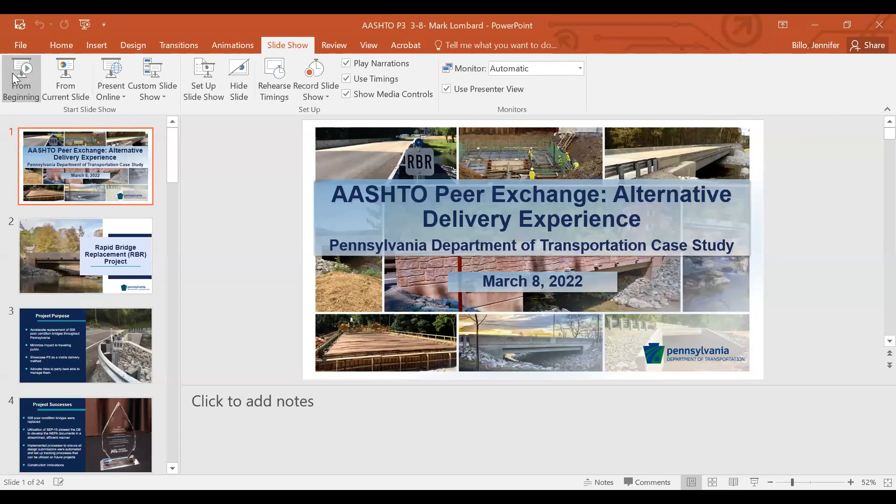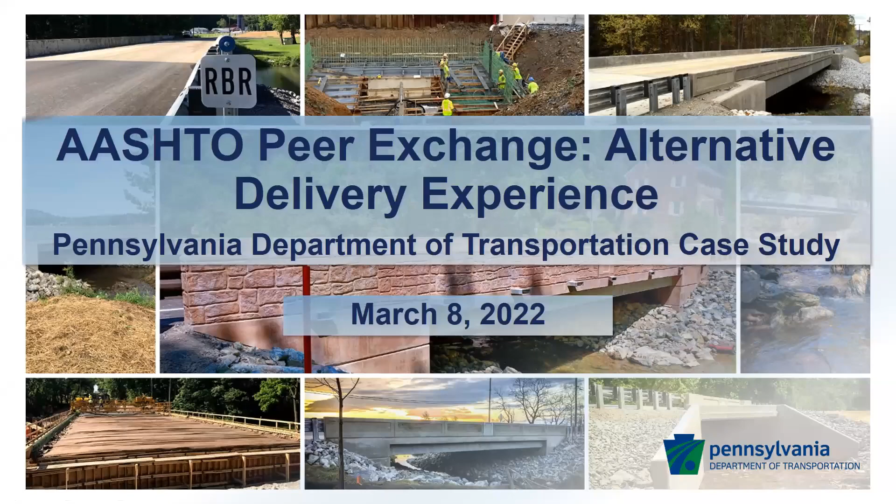I'm going to first talk about our rapid bridge replacement project, which was a P3 procurement project. And then we're going to talk about some of the comparisons of the alternative delivery, basically P3 and design-build. The RBR project was, like I said, a P3 project that replaced 558 poor condition bridges throughout the state of Pennsylvania. It was a project in which the development entity designed, built, maintained, and financed this project, and they have a term of 25 years to maintain the bridges.

One of the primary benefits of this P3 alternative delivery model was that the Commonwealth was able to replace these 558 poor condition bridges, and we did it as a complement to our normal program. So we were able to continue on with our normal program, plus address a great need within the Commonwealth of a lot of poor condition bridges. Next slide, please.

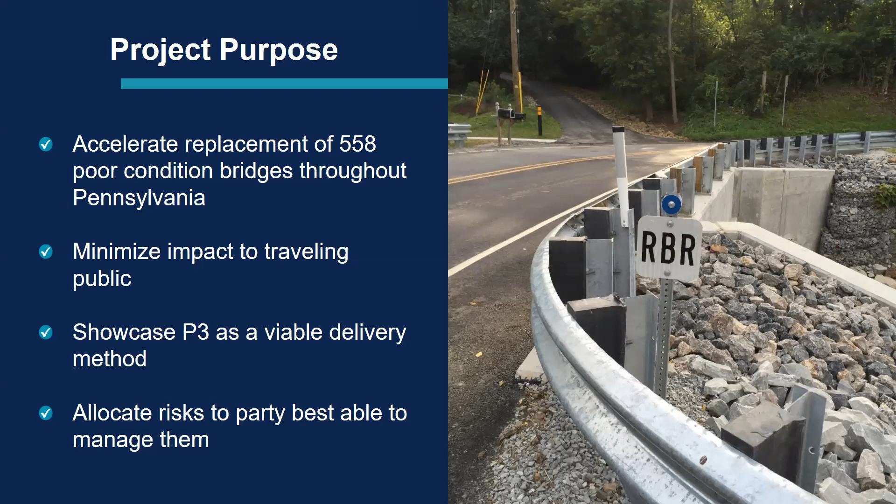Okay, we did have to get a SEP-15 approval for this project, because we did have the development entity do the NEPA documents on that, and Mark will probably touch on that a little bit more. But this was kind of innovative, and without this, we really couldn't deliver this project on time as we had promised. Next slide, please.

Okay. After the project was done, we worked with the development entity hand in hand, and we developed lessons learned throughout the project, so we can learn how to do things. And the first thing we came up with, as someone alluded to before, is whenever you use an alternative delivery, you have to use it on the right project, right assets and things of that nature. It's not a one size fits all. So project selection is very key.

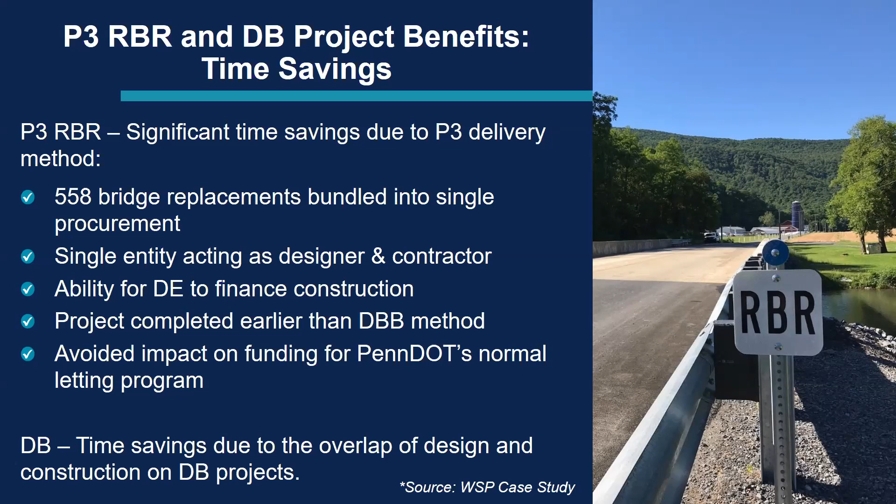The RBR project, PennDOT was in regards to change orders. We did have a lot of what we're calling here owner-directed change orders, which we knew going into the game we would have to process. For example, a couple of things we took on were utilities relocation. We paid for the utilities relocation and any unforeseen environmental hazards that were out there. We knew going into the game we'd have to write those types of change orders.

But as you can see by the last bullet there, it's coming back to the right of way and utilities. Sometimes no matter how good you do your job in regard to that, if you have bad right of way acquisitions and some of your utilities go bad, that can turn sour real quick.

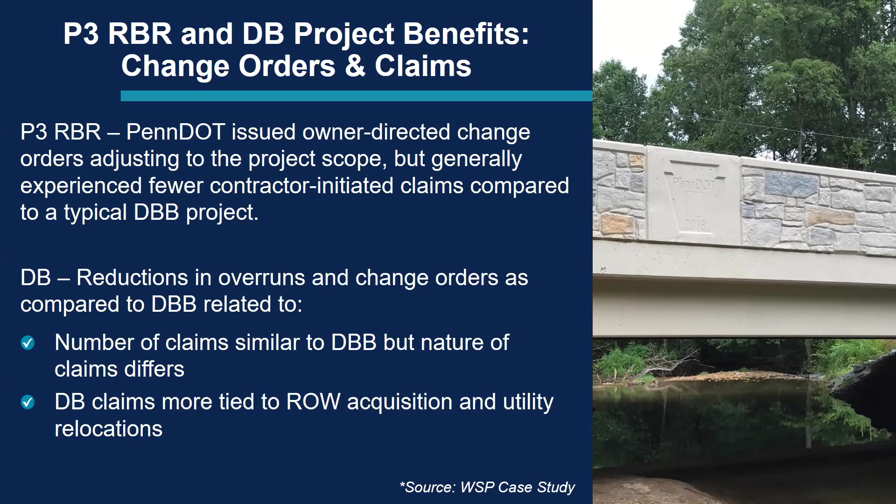All right, so the last slide we have here is regarding the comparisons of the P3 compared to design build and design bid build. With the P3, it depends upon your type of project and what type of innovation you're going to get if it allows for that. But we have found that the P3 project, along with the design build project, will give you a lot more innovations. It gives them a little more flexibility as opposed to design bid build.

And we found that with the two alternative deliveries of P3 and design build, you're going to have a lot less scope creep than you would during design bid build. So that's a quick comparison in regards to our experiences using alternative deliveries. I'd like to next turn it over to Mark to talk about the NEPA experiences we've had and the environmental.

Excuse me. Thank you, Gary. Can you hear me, Gary? We can. Thank you. Okay.

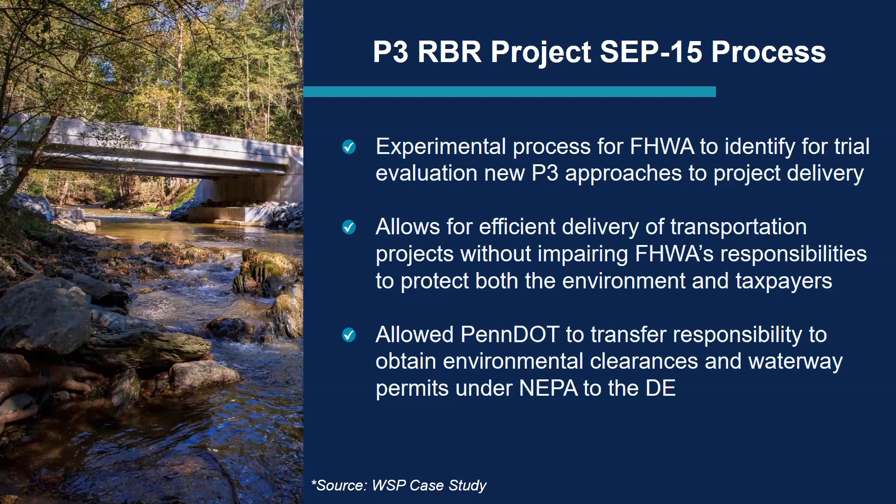Basically, this was to deviate from 23 CFR, and I'm not going to go into the numbers, because I'll just get them all jumbled up anyways. But basically that's what it says in 23 CFR. 636 is the start, but this prohibits the contractor from doing their own NEPA. And this process was to see how it would work out if they do allow that or change 23 CFR to allow that. Basically, they're looking at ways to save time and money for infrastructure projects.

That last bullet point on there is very important. We did retain exclusive control over the consultants who prepare the NEPA documents, but we also had the final approval. The DOT, PennDOT in this case, had to sign off on all the NEPA documents. All right, next, Jen.

When we did this experiment to see how well this was going to work out and look at time and money, we compared it to a baseline, and our baseline was, out of the 558 bridges, I think there were 78 very similar bridges that we measured the time and cost to do those. So that was what we were comparing the rest to. So in essence, we got the contractor a jump start by getting the NEPA clearance, and it doesn't really matter, but I think it was like 60 or 70 bridges. And then that's what we compared our numbers to at the end.

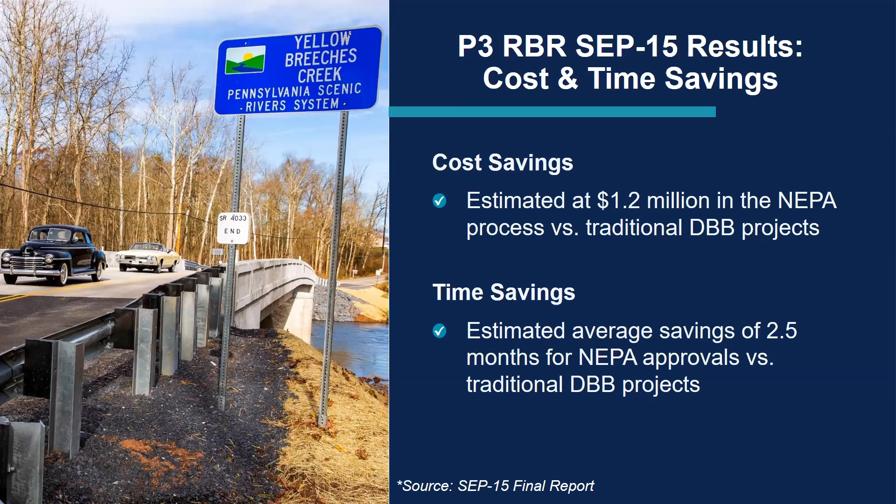The lessons learned that we pointed out here: make sure the consultant is familiar with the environmental manuals and policies. And since most of the consultants were our local consultants anyways, they were pretty familiar with them. But I can tell you, the contractor, the development entity, questions a lot of the stuff that needs to be done in NEPA because they're contractors. They have no idea what it takes to go into the preliminary engineering and get that project through the NEPA process into design.

Ensure the subject leads or key personnel are what they say they are. I would take a real hard look at them, because when you have the lead for the environmental on the development entity side asking what 4(f) is, that is not a good sign. So take a good hard look and try to get some expectation that they're going to stay with the project throughout, which we can't really do, but it would be very nice to have that in writing somehow, but we're probably never going to get that.

And also ensure the environmental is a collaborative process to minimize redesign and reevaluation. It happened over and over and over. It wasn't the end of the world, but it takes time. Next, Jen.

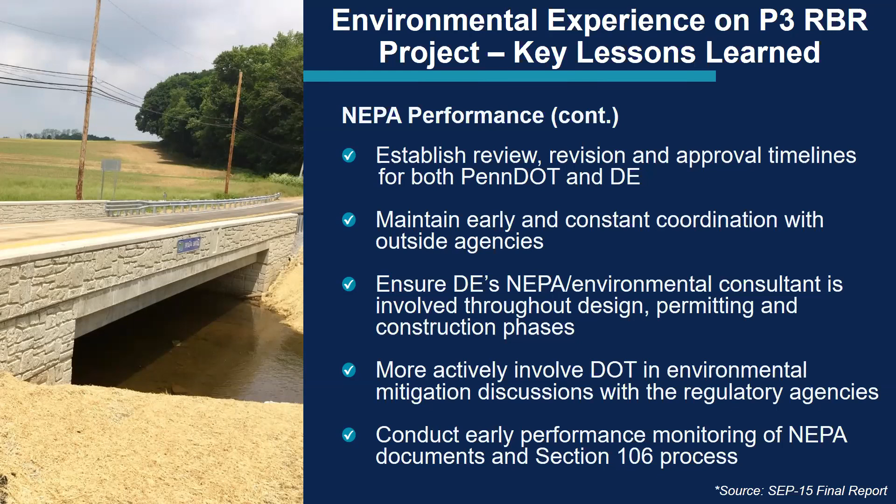These are a couple of the products that came out of our lessons learned. We developed a streamlined aquatic resources report instead of our typical ones that can take months and months. We got together with our local water resource agency, came up with a report checklist, basically slap a few pictures in there, and it was done.

We've developed a streamlined Section 106 process with our SHPO, which expedited the 106 process, which we all know can take forever. Also, in conjunction with FHWA, we made a 4F template that made it much easier for them to get through the 4F process. These special 4F and 106 items were only on a few projects—we tried to screen most of those out, but there were some in there.

And that is it for me. I'm going to turn it back over to Gary. At the end, if you have any questions about this, we'll be happy to take them. All right, thanks.

So let's talk real quick about alternative deliveries and some of the key takeaways, key factors that we've had experience with these.

Let's talk about design build here. I'm not going to read all these things, but obviously some of them apply to design build. We've found better success with a more complex scope of work—your run-of-the-mill scope of work isn't really suited for it, unless you bundle things together. Design build is more fit for that, a more complex type of scope of work, because it's where you're trying to draw out those innovative solutions, those ATCs, the unique approaches that we typically don't do otherwise. That's one of the things we've learned.

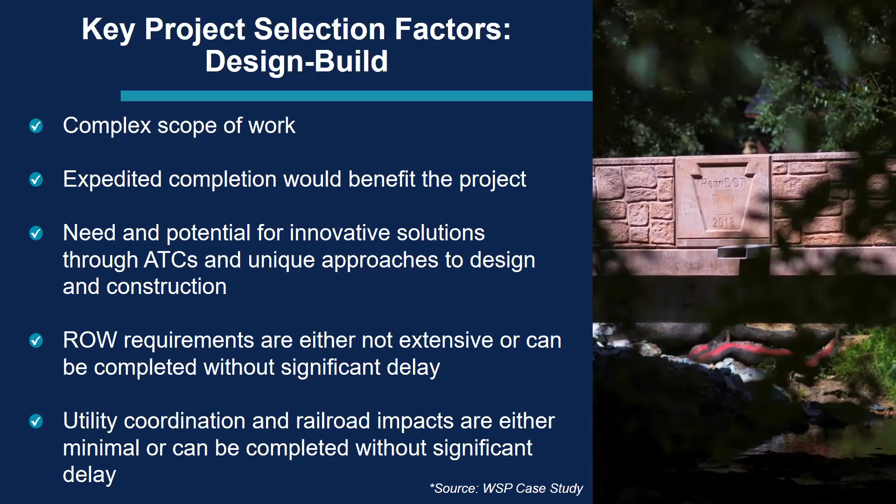The P3 method in regards to alternative delivery, like for the RBR, it was great that we were able to get those bridges out the door without impacting our normal program. That can be a very much benefit, and some of the bridges we addressed weren't on our program for another 10 years. We were able to get those out the door and meet certain things. It's almost like an availability payment, a mortgage type payment, and it can relieve you of some of your obligations during your normal program regarding maintenance, if you're kind of stretched that way.

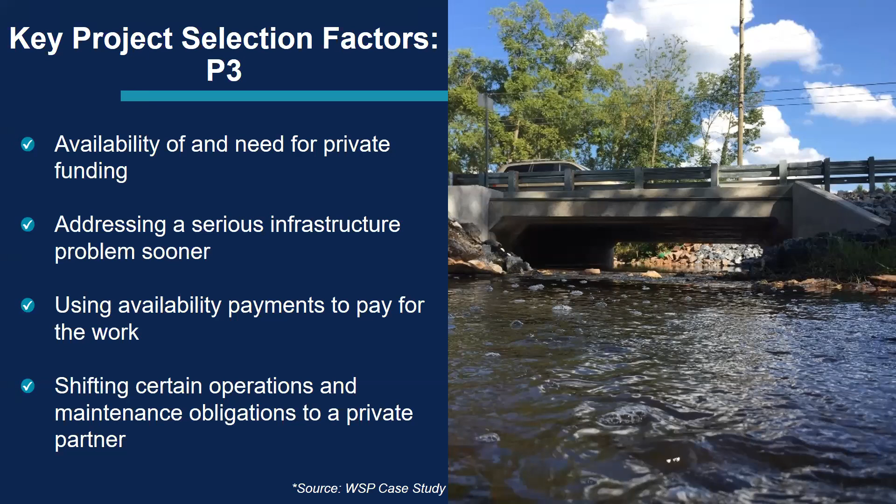Next slide, please. Some of the overall things applicable for alternative delivery - number one thing I like to stress is proper risk allocation. You've got to understand who is best fit to do what you're trying to ask them to do, and in the most efficient manner.

Implementing time management early on, and early discussion - that seems to be the key in regard to a lot of things. Getting your house in order before you start jumping into things. Everybody wants to jump into it, but try to resist that. Get things worked out, establish your rules of engagement between you and all the parties, and we found that really does help you out in the long run.

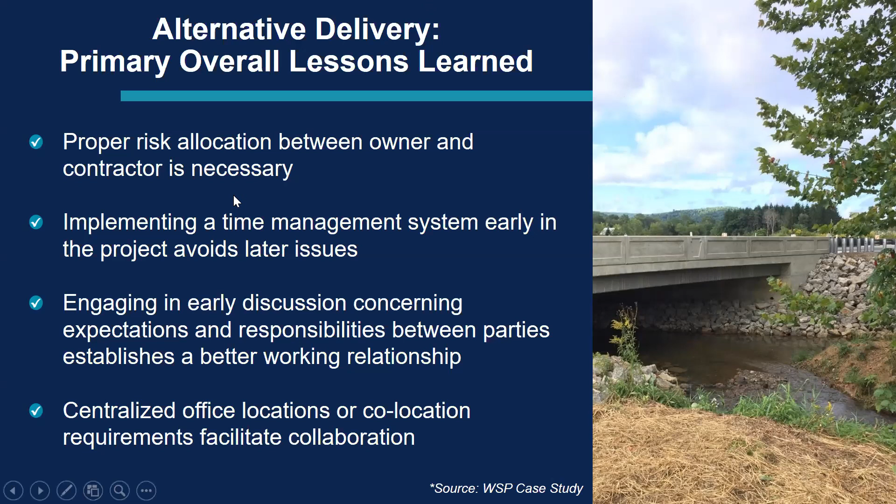Next one, please. And the last slide - have your comprehensive operational plan up front, and that includes a lot of things. You're going to need a dispute resolution process. It's not a bad thing - these are the means that you work things out, and you let people keep focusing on what they really need.

One thing we learned from the RBR project is if you have a widespread effort across different engineering districts - we had 11 different engineering districts - you have to really watch against that, especially in design build or alternative delivery. Just because it's not the normal way of doing things doesn't mean it's a bad thing. You just got to be cognizant of it, be cautious, and try to reduce those issues as much as you can.

The last thing we've learned, as Mark was talking about, is coordination with your stakeholders and other agencies - extremely important. Get them on board, get them on board quickly, and 99% of the time they're going to be a very supportive partner with your project, because everyone's trying to attract the same things here. You just got to get them engaged early, have them understand the process, and develop those relationships - that will really help you out with your project.

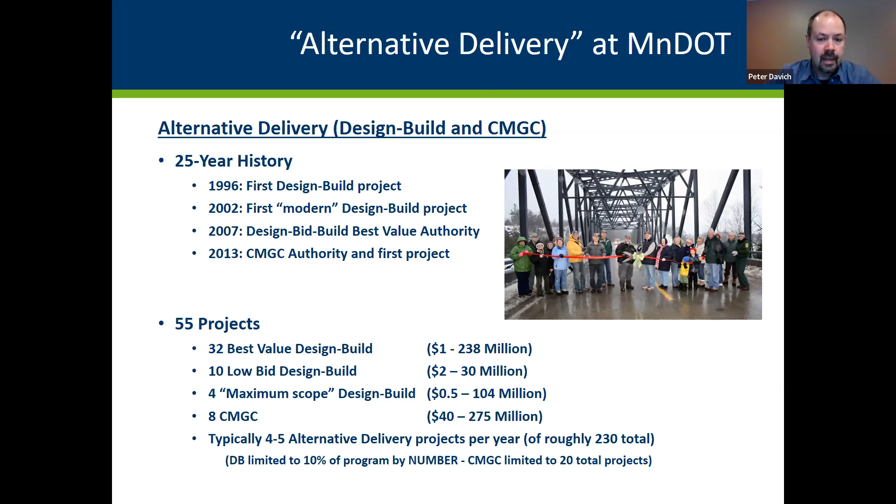As far as how we're arranged to do this, we are a decentralized state for design build. There's a few of us who have central positions who support the districts in running these. I am the design build program manager. Kevin Hagnes is our CMGC program manager.

We do have a design build oversight engineer who we try to assist with the projects following letting, although that position is open right now. We have some others who help, like Kevin Kosabud. He helps with construction innovation, regardless of delivery method. And Tony Lesh is specific to bridge for design build.

As far as this meeting and workshop goes, we do not have anybody specializing in design build environmental. So we use our central environmental staff, and I go in and assist with the design build specific aspects of that.

Beyond that, I don't have a large office or staff. What we do have is a general engineering consultant who supports me and the districts per project.

I tend to help determine which method we use to deliver the projects. I help them make strategic choices on the projects. I'm the project controls gatekeeper. I make sure the verification is keeping everyone honest in regards to what the contract actually says.

And help with some training. Our general consultant helps actually writing the RFP, doing the horsepower there. They add some thoughts and expertise from other states, and they really fill out all the extra horsepower that we would need to deliver design build projects.

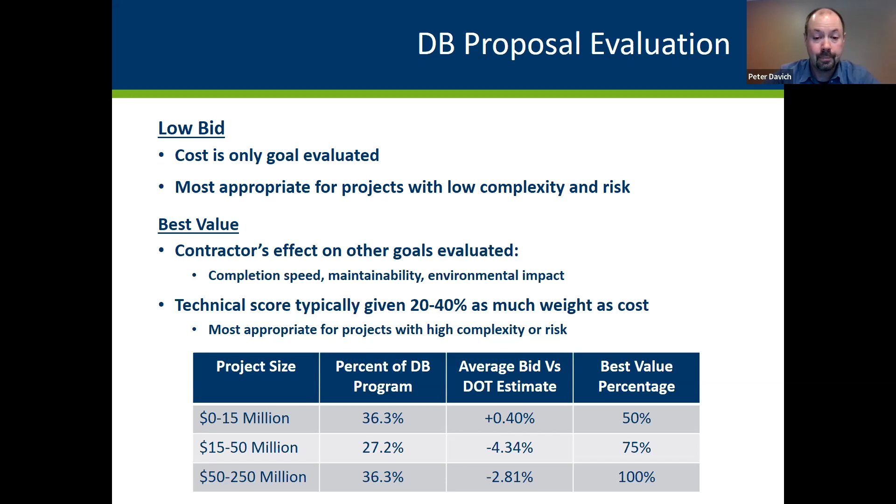Next slide, please. To get to the NEPA part of this.

This is some lessons learned from my position and previous positions, just over time through several projects. I should have said I've been the program manager at MnDOT for about 9 years now, and I've worked on half or more of the design build projects that we've probably done in Minnesota.

Some of this may sound familiar to Pennsylvania's experience, but I'll go through it. One of the things we realized early on is to try to keep the NEPA process as similar as possible to bid build. We try to complete more or less the bid build process before going out to design build, and to keep the contractor out of NEPA as much as possible.

We want to make sure we are being as appropriate as we would in bid build. We want to make sure cost focus is not causing the contractor to make different choices in the NEPA process. In Minnesota, we have completed the environmental documentation before advertising an RFP almost every time. There have been a couple specific cases where we haven't, but frankly we were just waiting for a final signature, and we got approval from FHWA to move forward with that signature pending.

With that said, the things you do differently during documentation would be to talk much more about performance than specifics. We do usually complete a layout as usual to go along with our NEPA documentation. But my role in staying active with that is to remind everybody, we have the layout, but we're not telling the contractor to build exactly as the picture looks. We're committing to performance as opposed to specifics.

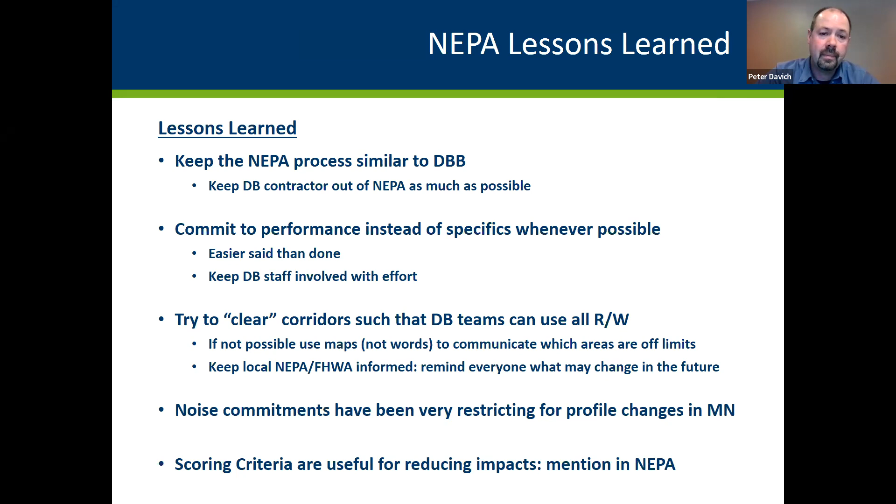One project we had was, and I should say all of these were lessons learned. They mostly relate to whether we needed a reevaluation of the NEPA we had done once we ran into an issue following letting. In most cases, we have found that the changes we've made in the design build did not rise to the level of reevaluation. Sometimes we've talked about it and it's been borderline. There have been a couple of rare cases where we've had to, but that's usually something we keep in mind when writing NEPA in the first place, and certainly try to avoid if possible following letting, but you have to when you have to.

The first example on here is a major river crossing. It was I-35 over the Minnesota River, on the south side of the Twin Cities. The roadway line changed 50 feet as we were going up the bluff on one side of the river. As you might think, you're having different impacts on a bluff above a river. That kind of screams, hey, look, you're changing different things. This might be a reevaluation needed.

As we worked through it with those involved with NEPA and the FHWA, we found that the entire shift was contained within the right of way. Obviously there were different impacts, but to some extent it was just different trees - they were on the east side of the road as opposed to the west side. The functionality of the road didn't change, and no different wetlands were impacted. In the end, we took a look at it and asked, is a reevaluation really needed here? We read the text in NEPA and said this is categorically the same situation as discussed, and because of that we concluded no, even though it changed by 50 feet based on a contractor's different concept.

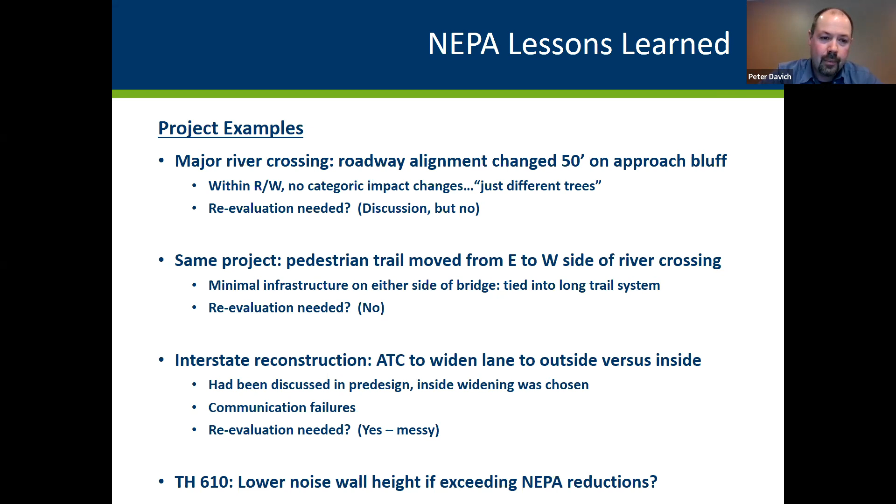Because the houses were out of the way and it was not really an official park, there was not anything here to be technically impacted on an environmental level. So the NEPA documentation was not very substantial. However, it was an environmental problem that we had to solve that was somewhat outside of our regular expertise as roadway designers in MnDOT. So we thought of delivering this a few different ways.

We could do it in design bid build, but we aren't necessarily experts at solving failures that, in this case, extended 90 feet below the ground. We had some ideas, but weren't really sure what contractors might be able to do that would be more efficient. We thought about using CMGC to once again control the design, but if you're only selecting one contractor to work with from the beginning, you're going to be tied to their expertise and not necessarily be able to consider other types of solutions, or they'll be likely to encourage particular types of solutions based on what they typically do.

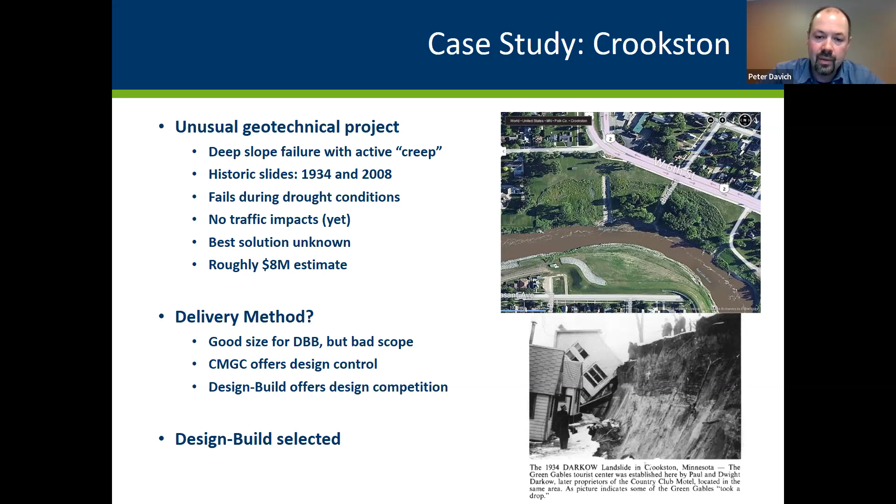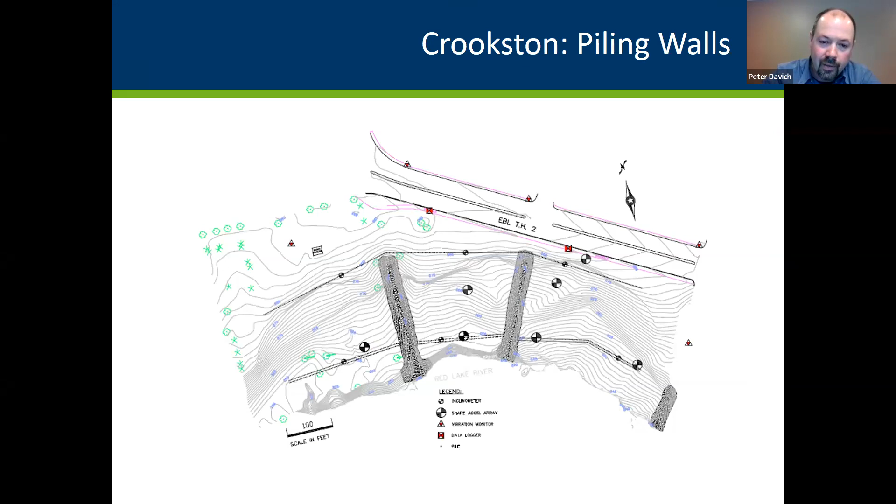So as we flip through the next few slides, we can see the four proposals we got for this. The first contractor gave us this proposal. They said, you know what we'll do? You've got a big failing slope. All you need to do is, maybe you can see it there, pound one row of piling up on top of the slope to keep things from moving, and then pound a double row of piling down near the bottom to keep the slope from failing down at the bottom. And with those 700 piling toothpicks in the ground, that'll keep your slope from moving. This is the best way to do it, MnDOT. Next slide, please.

Another one came to us and said, no, that's not how you solve it. What you do is, because this is a big circular failure where at the bottom it's kind of pushing out into the river, you put some anchor blocks down near the bottom. Those are the kind of red squares you see near the bottom of the slope on this graphic. And with the anchors down at the bottom, you then shoot a cable from that 100 feet down into the ground until you hit the bedrock.

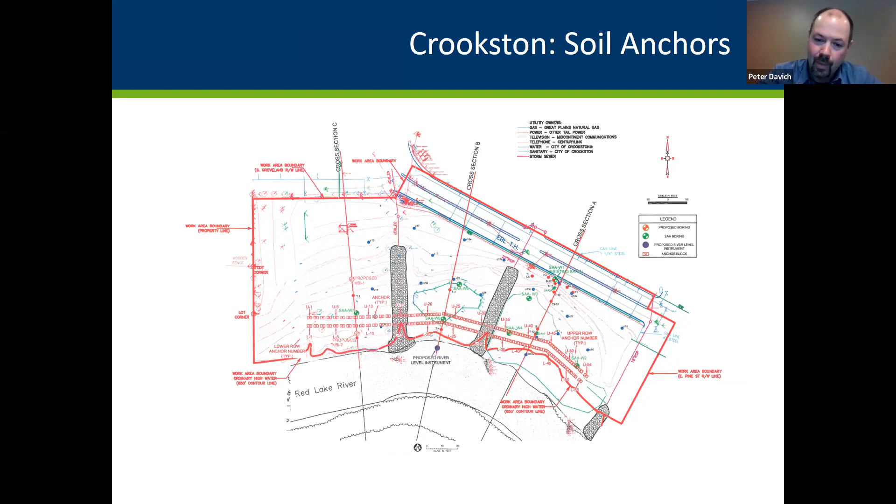And with those anchors cabled and attached down to the bedrock, if the bottom of the slope can't move outward, your slope can't go anywhere, and it'll be holding it in place. You might have to change the tension on those from time to time, depending on what's going on. So it's sort of an active solution, but hey, MnDOT, this is the best way to solve it. Next slide, please.

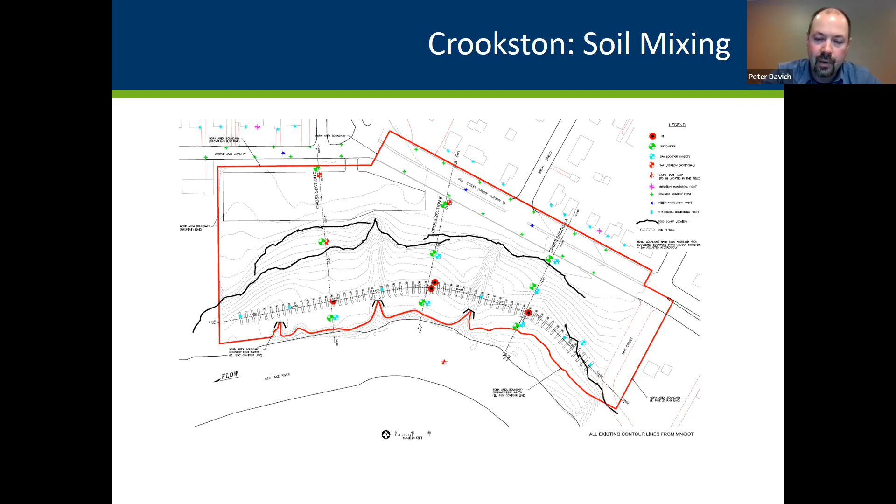The third contractor said yet again, nope, there's another way to do this. What you really want to do is go in and do some soil mixing. So in every one of those kind of rectangular areas you see there along the slope, you get a machine that digs down deep, pulls up a lot of material, mixes it with concrete, and pushes it back down in the ground. And in the end, you have basically concrete pillars of sort of cemented soil every, I believe it was 50 feet or so across that failure plane. And once those are there, it kind of prevents anything from moving. And once again, you've got it anchored in place. Next slide.

So the first three solutions were all things we had sort of considered when doing this internally. The fourth team came back and gave us something that we hadn't frankly thought of before. They said, no, you don't need to do any of that. What we would do is we actually have a huge excavator that has a 100-foot boom on it. All you really need to do is sit up at the top of the slope, use this excavator with a huge boom to reach down about 100 feet, slice through the soil and pull up these kind of shear walls.

So they took the soil out along those slices you see. They held the cut open with some grout, but they put the soil back in and basically, similar to the soil mixing, they put these shear walls in place that actually extended from the top of the slope most of the way down. But then they also went, whatever it was, 80, 90 feet below ground because of the huge excavator that was available. And with these shear walls spaced every 50 or 100 feet, there was no longer enough space between them for the failure plane to develop.

And they were anchored in place that way, in frankly a way we had not considered using, because they had equipment that we did not know was available for this. And long story short, we looked at the four of these, and our geotech studied it with some experts and said, frankly, this fourth one looks like it would work very well. And it's a kind of simple, elegant solution. We chose the fourth one. And as we moved through the process and got to the end, the bids came in.

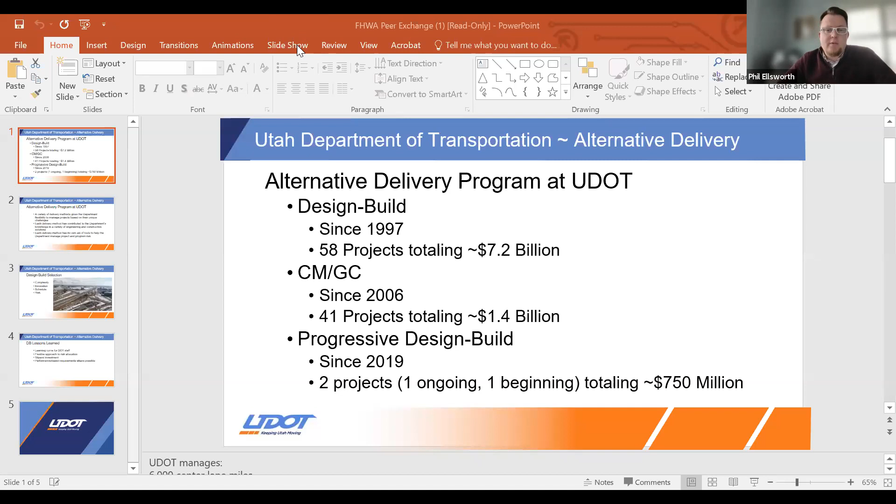So just to give you an overview of the alternative delivery program at UDOT, UDOT has been utilizing alternative delivery methods since about 1997, when a few years before the Olympics came to town, it was determined that some significant infrastructure upgrades needed to occur, and that this was going to be a project of such magnitude that the department had never done anything like this. And it was determined that design build really was the best method to accomplish that.

And other than tweaks along the way and lessons learned, the department really hasn't looked back since and has just been adding to their repertoire in terms of alternative delivery methods available to them. So like I said, since 1997, the department has engaged in about 58 different projects totaling about $7.2 billion for design build. For CMGC, they've been utilizing this method since about 2006, have done about 41 projects totaling $1.4 billion in total project funds.

And then finally, a new one being added to the toolbox here is the progressive design build method. This has been utilized just since 2019. There's one project ongoing and hopefully coming to a conclusion soon towards the end of this year. And then there's one progressive design build just beginning as well, where they have just selected a progressive design builder and are just getting rolling on that one.

So the bottom line here is, for a state of our size, this alternative delivery program represents a very significant portion of the project dollars that the department manages for the state. And depending on the year, it can represent a very significant chunk of the total project budget, certainly over 50% for most years, at least within the last 10 years. Okay, go ahead and go to the next slide.

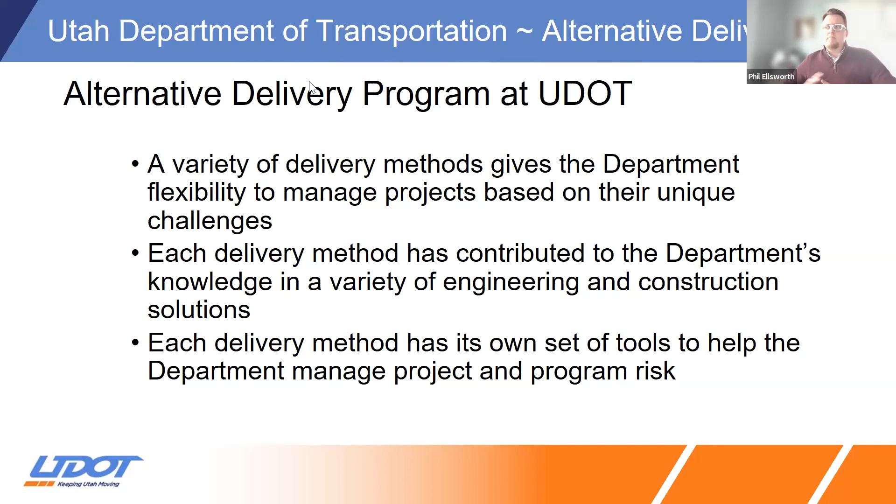In the case study written up for this presentation, the methodology utilized to determine design build as the selected method for the I-15 Tech Corridor project really boils down to four main points, which tend to surface a lot in determining whether something goes design build. The first one is complexity.

For large complex projects, design build tends to be a utilized tool a lot, because a design builder can bring to the table a variety of resources that the department simply doesn't have access to otherwise. So complexity is a big factor in deciding to go design build.

Another element is innovation, and you heard this in some of the other presentations as well. When you're looking for unique ideas to unique challenges, design build can really bring a lot to the table in terms of getting a lot more eyeballs on the problem, looking for solutions.

This comes through both the process during procurement, when you're sitting down and engaging these design builders one-on-one before they bid the project, but it also extends into the contract administration portion, when you can really collaborate and find solutions to smaller problems as well.

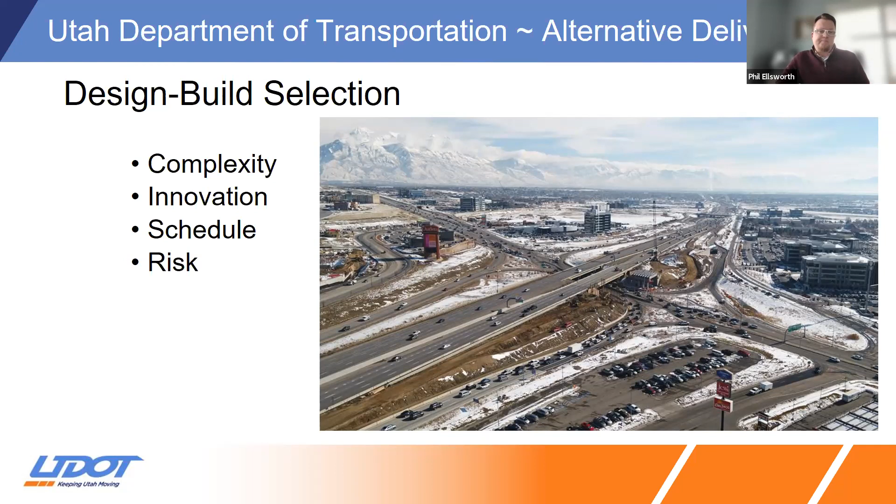So just some things to talk about in terms of lessons learned—these are more detailed in the case study written up for this, but let me touch on them briefly, and then I'll turn the time over to Brandon Weston, who's going to get into the NEPA aspects of our presentation today. So with regards to design build lessons learned, some things to take away here.

There's oftentimes a learning curve for DOT staff on these projects, and it's not just at the beginning of a whole program—it's a constant learning curve, because design bid build is still a delivery method utilized quite significantly, and most DOT staff have the most experience with it. Depending on where you got your alternative delivery project and how it's structured in terms of which regions and districts and other staff have been serving on those projects, you can often come up with a situation where new staff is not experienced in design build or other alternative delivery methods.

So it's important to have a good training program set up to bring people up to speed, because with design build you have to think so differently from design bid build. You're really turning things over to the design builder—that's the intent—and then simply managing them to make sure they're meeting your standard terms, specifications, other guidelines and RFP requirements, stepping back and not controlling things prescriptively as much. That can be quite a learning curve, so having a program to help everybody get on board is important.

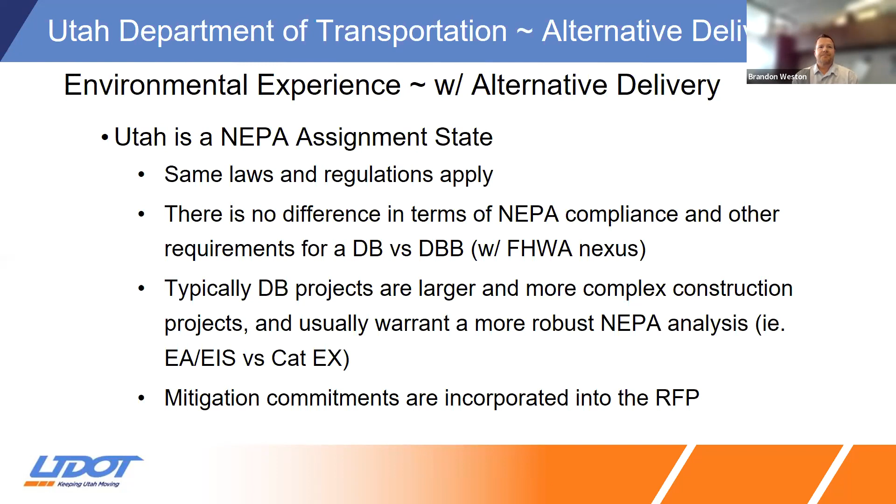So I also wanted to talk about ATCs, alternative technical concepts, which have been somewhat of a challenge to us at the department as they come in, because we do these EISs, we do the EAs, we secure 404 permits a lot of times before it goes out in RFP to look for that innovation and those changes that we're really looking for.

So from an environmental perspective, when we take a look at those ATCs, we look at what likely changes to the environmental process would occur with that change. Is it a NEPA issue? Do we need to think about doing a reevaluation? Are there other issues associated with that in terms of changes to 404 permits and other permits?

And what we try to do is keep those as much as we can as the responsibility of the design builder, not get in the way of the design builder being able to make schedule with an ATC that we've approved, essentially from an engineering perspective, not necessarily environmental.

The process and coordination on how to approach those changes when they come out after the RFP is spelled out in the RFP with regard to the specifics of that project, whether it's a 404 permit or otherwise. The authority and review for any NEPA compliance that takes place after the award to the design builder, we again try to keep as much risk as possible on the design builder, which I think is a benefit to them as well, because they have more control.